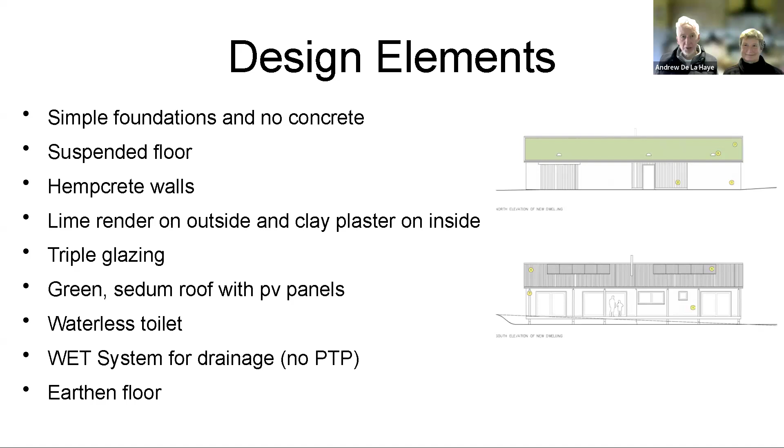The other alternative is screw piles, which are very easy to fit. You just come along - you don't have to clear the ground - with a small machine smaller than a car, and they screw them into the ground until they get the right torque, then they stop and cap them off, and you build your house on top of that.

The reason for no concrete is that we're very conscious it takes a lot of carbon to make - 7% of global carbon emissions are from concrete production, and it's very water intensive as well. From our practical point of view, it's a cold material - we've got a house now with concrete under the floors, and they're very cold. Having watched other people's houses go up around us, concrete foundations are also very slow to install - real time suckers really. So that's it.

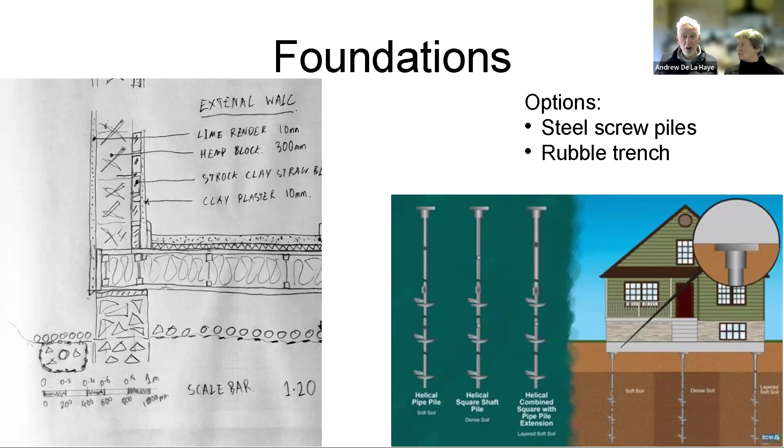We'd probably go for the rubble trench because it's simple and natural, and embodies less carbon than the steel screw piles, and it's going to be cheaper. So the walls, there'll be a timber frame that goes up, and around the timber frame will be hempcrete.

For us, hemp is really good because it absorbs a lot of carbon dioxide during its growth period. It's much more absorbent than a forest, for instance. Hemp typically absorbs between 8 and 15 tons per hectare of carbon, and a forest in comparison is 2 to 6, so it's 2, 3, or 4 times more absorbent.

And also the lime in the hempcrete continues to absorb CO2 during its lifetime. A figure I read was 110 kilograms of carbon absorbed per cubic meter, so that's a fairly good contribution to climate action.

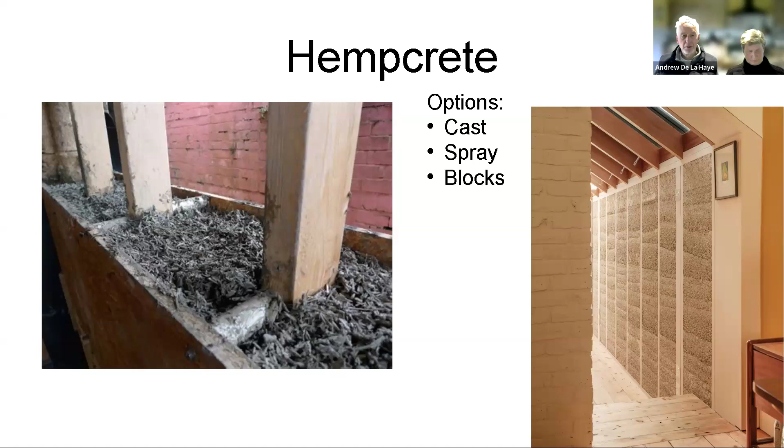It would be hemp, and on the outside we would put lime render, and on the inside we'd put clay plaster, and they are both also absorbing. So it's minimal elements — again, part of the simplicity argument.

On the outside we would put lime render. Lime render is breathable as well — it's moisture control, so it absorbs moisture. It's vapor permeable, and because of the lime, again, it absorbs CO2. So it's a house that's sucking CO2 out of the atmosphere.

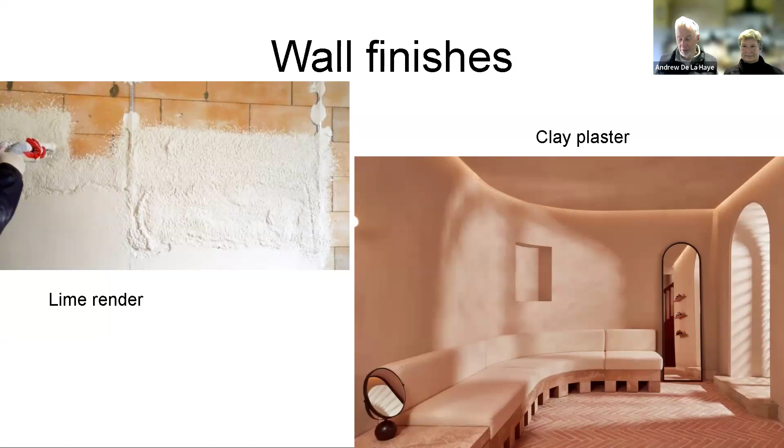The other natural material we're looking to put in part of the house, at least, is an earth floor. It's made out of earth — we could make it out of the earth we dig out for the foundations, or we could import it if we want something slightly different. It's mixed up with straw, applied, and allowed to dry.

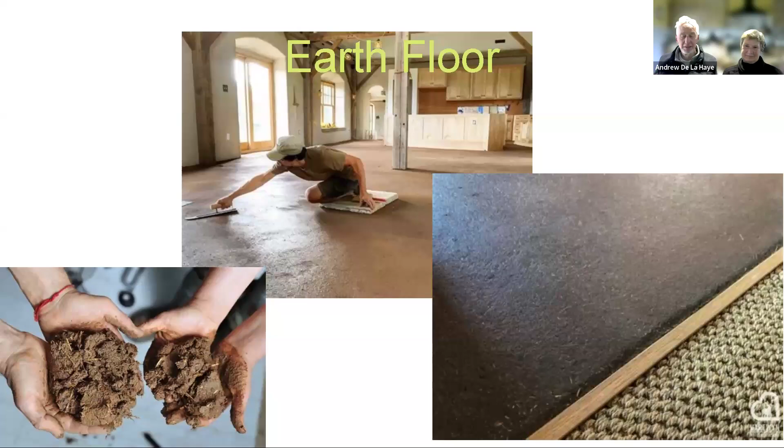It's a really soft touch underfoot. It's durable because it hardens, it goes off, and you can put furniture on it, you can walk across it — just don't use stilettos, so it'll be a no-shoe house. It's also insulating, so it'd be a nice material to stand on.

On the roof, we're going to have these sorts of trays to cover the entire roof with sedum. They come in interlocking trays — in the tray you've got the growing materials, the compost, and the sedum plants. It comes ready populated, fully grown, and you just go on the roof and slot them together until the roof's covered. So it's a very easy thing to put on the roof, and it's a very beautiful thing.

It'll help with insulation — there'll be less variation in temperatures through the roof, and it'll absorb maybe half the rainfall that falls on it; that will go into the plants themselves and then evapotranspirate into the air, which means there's less surface water coming out and potentially flooding the land. And of course, it's great for biodiversity.

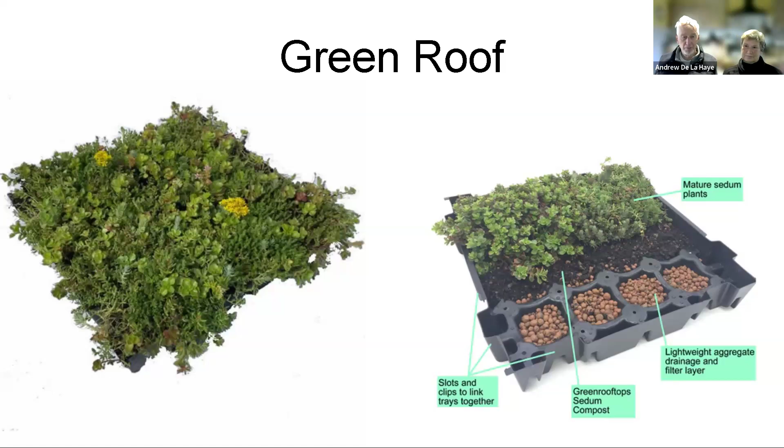But yeah, we're going to mix up solar panels and a green roof. There aren't many examples we've been able to find where people do that. We've got solar panels on our current house, and they've paid for themselves in terms of the feed-in tariffs we've had over the last 12 years, and they're generating profit now. But in today's climate or economic climate, they're not so easy to get grants or payments for.

It's more of a free market now, and we'd like to have batteries as well to balance the power, so we've always got some even when the sun's not shining. But it becomes a question of how much payback we can get to justify the investment. In our current house we use an average of about 3 units a day of electricity, and it's very hard to justify any capital expense on 3 units a day, even with a decent feed-in tariff.

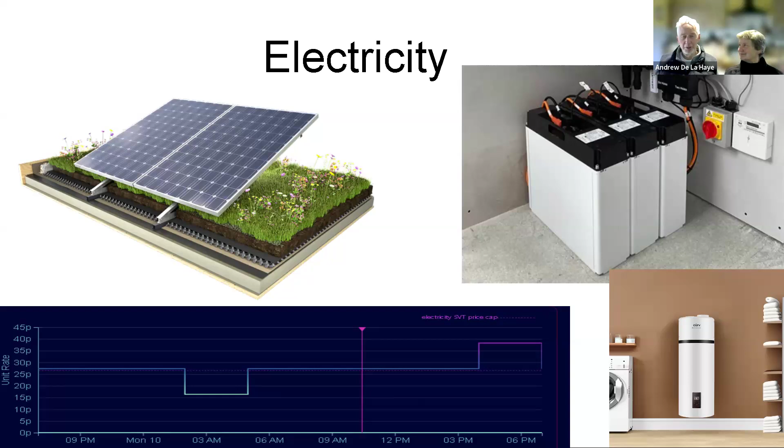It does need emptying. It separates the liquids and solids, but it doesn't use water. Typical water usage for a toilet can be 100 litres plus in a day for a typical house - that's a lot of water, really is a lot of water. So we're avoiding all that impact on the environment from having to flush away our waste materials with good drinking water.

I think in the future this country is going to have trouble with water supplies, given the weather patterns we have, no more reservoirs being built, and populations going up. So this is a good investment for the future, I think.

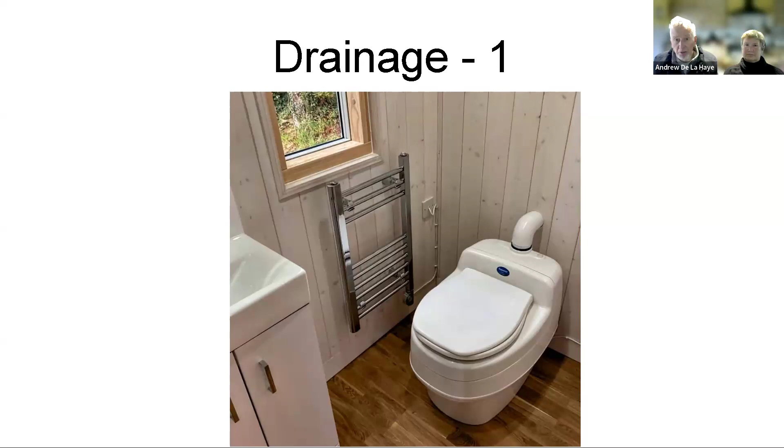And because there's no sewage, there's no need for a package treatment plant or septic tank to settle out solids, because the solids are settled out in the toilet and composted separately. The other part of the drainage is all the grey waters that come out of the house from the kitchen sink, the shower, the bathroom sink.

The willow coppice is a very thirsty and hungry plant, and it will absorb any residual waters and phosphates and nitrates and things like that. So we are effectively feeding and watering our vegetables first, and then our willow coppice area second.

It's a whole lined system, so it's like a big pond with soil in it, and there's no outflow, no pollution coming out of it. All the WET system is sized to very easily absorb all the water and nutrients, and have no output. So there's no pollution risk.

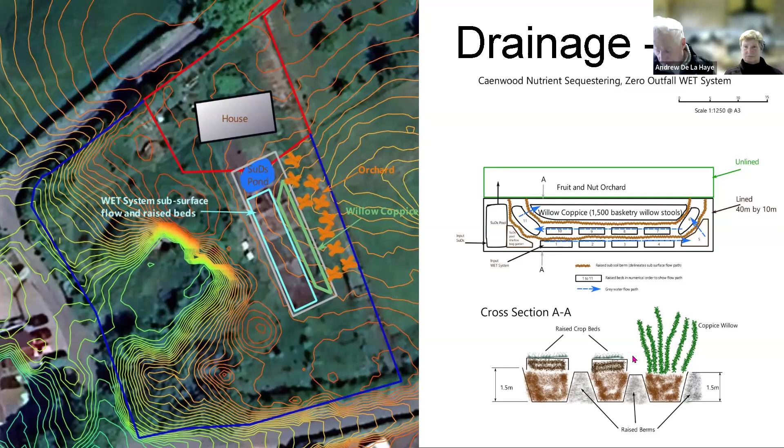Now, talking about circular systems - one element is the rainwater. The rainwater comes off the roof and goes into this SUDS pond, which is at the top end. It'll be a beautiful pond, 6.5 meters by 5 meters, with plants in it and stuff like that. That's where the bulk of the water will go.

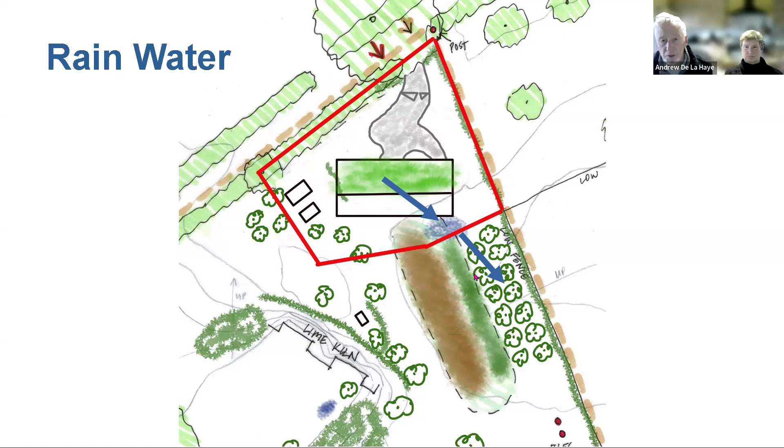And then we can use that water - we can siphon it off into the orchard area, which is here, or we could even siphon it off into the vegetable area if we're short of water, although that should be self-sufficient from the house. Another element is the grey water I talked about.

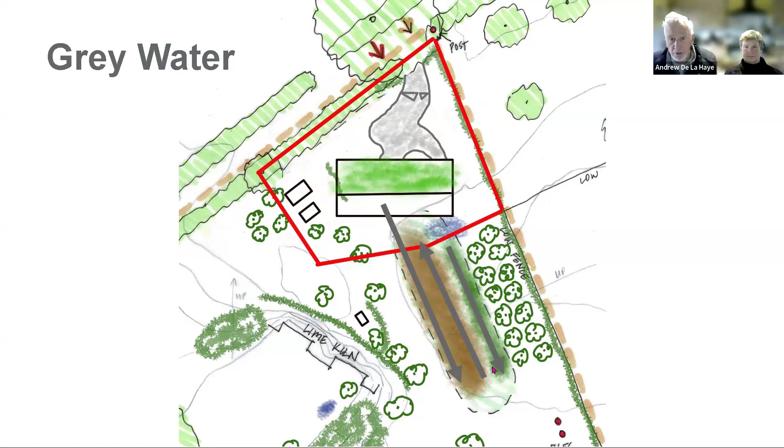It's coming from the house down this way, then across, then back up that way, then across, then back down that way. That's how the grey water goes, and it's feeding and watering our garden, so there's no waste.

From the compost toilet, which will sit in this corner, we'll transport it out to a compost bin around here somewhere, compost it for 12 months, and then all the pathogens are dead, and it's just like normal compost. It's soft and friable and dry, and we can put it on the garden wherever we want, probably on trees more than vegetables, and that's feeding our garden.

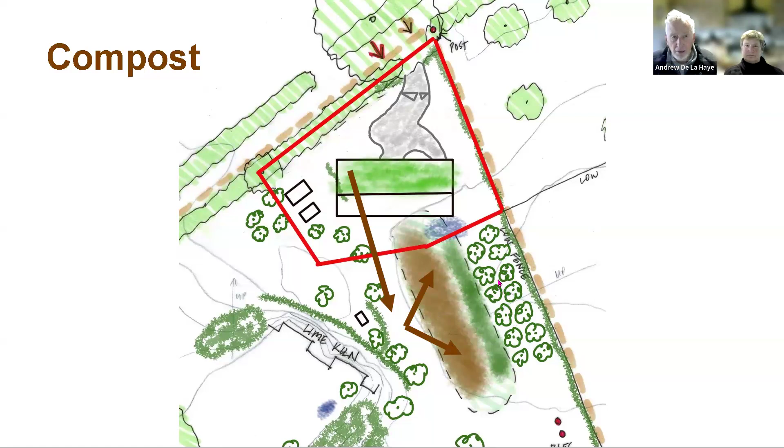So that's everything that's going out, and then the recycle is that the food coming back in is provided for by what's coming out of the house, and then the whole cycle goes around again, because we go back to the toilet and wash our hands, and it all cycles round and around. So that's the idea of the recyclability - the whole idea is that there's no waste, there's only resource.

We see everything that is traditionally seen as waste as a resource, and that's a permaculture principle. The problem of what do we do with all the grey water and toilet material isn't a problem, because it becomes a solution. It becomes a solution as to how we're going to keep our garden watered and fed. So there's a couple of permaculture principles at play.

The wet system has been designed and will be implemented by Biologic Design. So Jay Abrahams, who's a Herefordshire lad, is going to do it. It's a large system, 400 square meters.

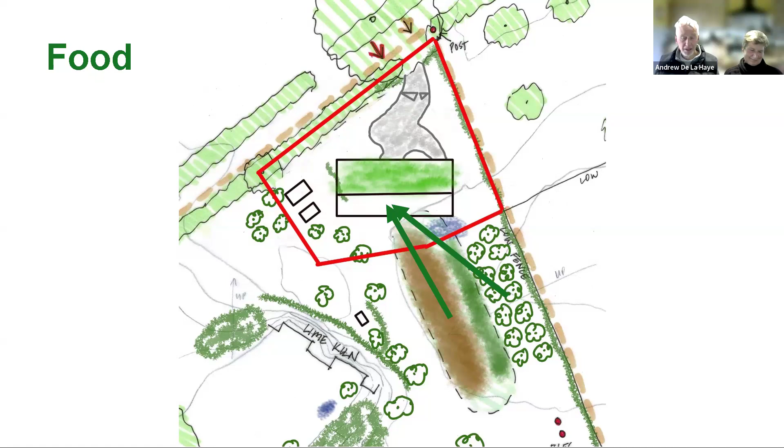Whereas the norm that Jay always quotes, and we've seen it elsewhere, is per person you're allowed 10 square meters. But because we had to fight our way through the planning system, it ended up being ridiculously big. So the next person coming along should be able to get away with a smaller system, as the planning authority gets used to it. But by the way, Herefordshire Council drainage team now love wet systems. They started off hating them, but we've pioneered our way through that and turned them around.

Okay, so that's the end of our talking, and we're open for questions.